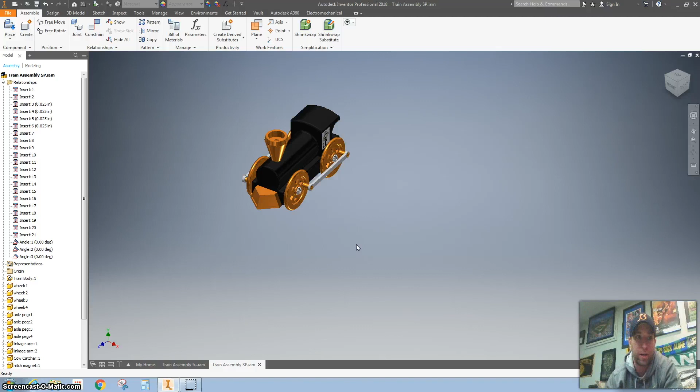All right, now that you got the assembly all done, it's time to add the train to the track. So let's go ahead and place in the curved track. You're only going to need actually one of these. Place it right there. Right click, hit OK.

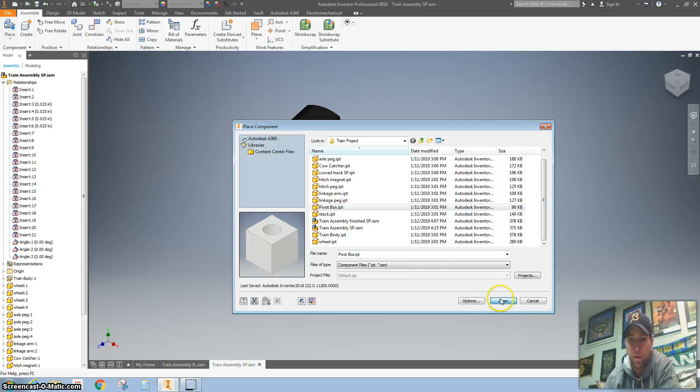And I'm going to grab a pivot box. So the pivot box is just a simple box or a cube with a circle in the middle of it. And now let's start constraining some things. So now let's make the track circular.

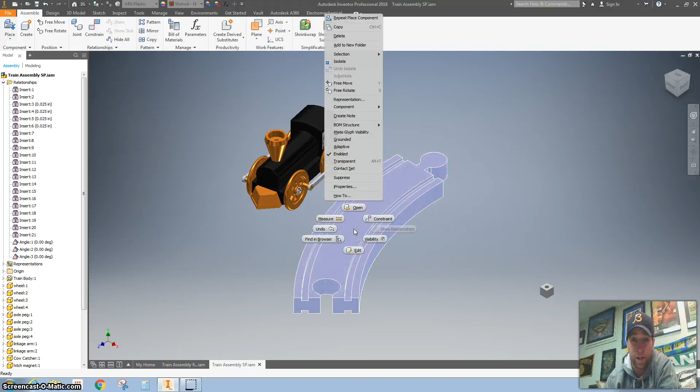So I want to click on this track, and I'm going to right click and ground this. So now that won't move. Actually, while I'm grounding things, let's click on the train body and unground that, because eventually we're going to put the train on the track. Alright, so that's all grounded.

Hit pattern, circular pattern, and you see I've got this selected. If you haven't selected it already, click on it, make sure it's blue. Another way you can check and make sure it's selected is it's blue over here.

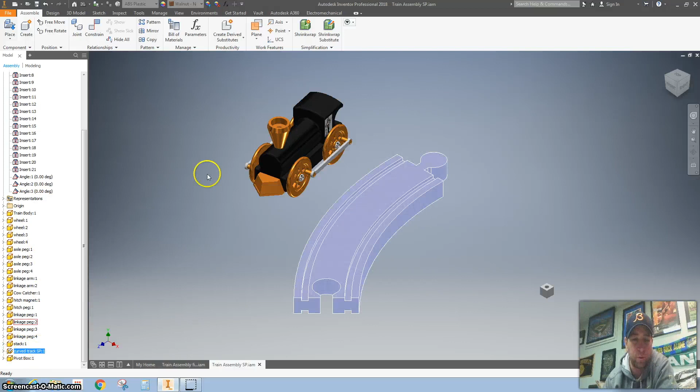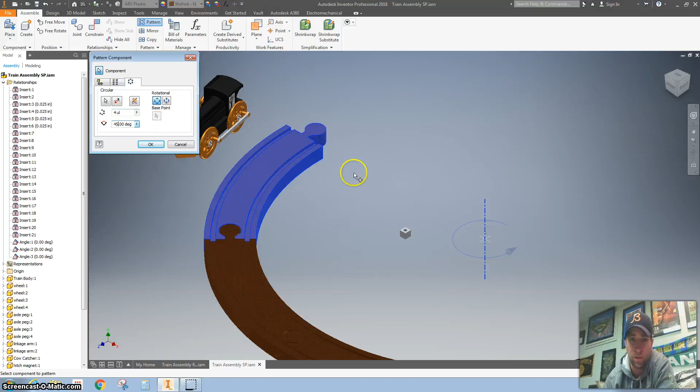And pattern, circular pattern, hit this red arrow, and you can actually pick any one of these curves. You can see I just clicked it one time and 4 of them showed up. I actually want to change this to 45 degrees. Look at that, they're all connected. And I'm going to need more than 4, so let's make that 8 and hit OK.

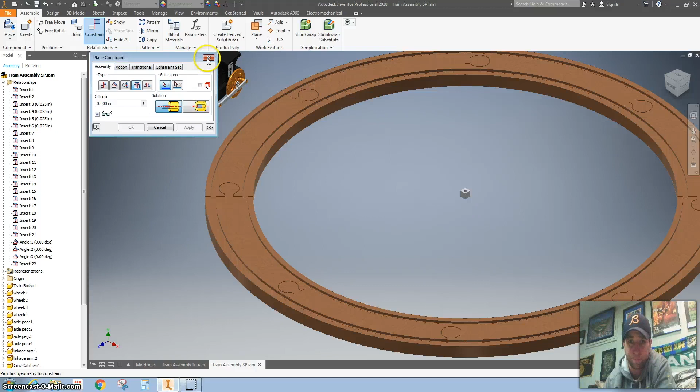Looking good. Alright, let's constrain this pivot box with an insert constraint. So I'm zooming in and I'm clicking on the circle there, and then I'm going to click on the inside of this curve, and actually you can click any of the curves on the track, and then I'll just line up the center lines, hit apply. And now let's get the train on the tracks.

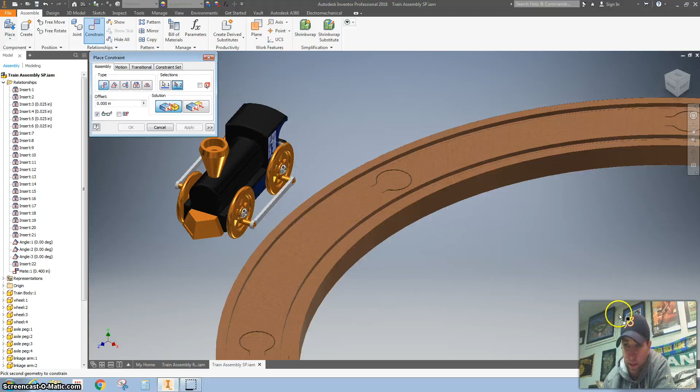Here we go. So I'm going to use a mate constraint with the top of the train track and the bottom of my train body. So I'm going to click on that, and I want to offset that 0.4. I want to mate the side of my train body with the side of my pivot box, and I believe I want to make that 15.3.

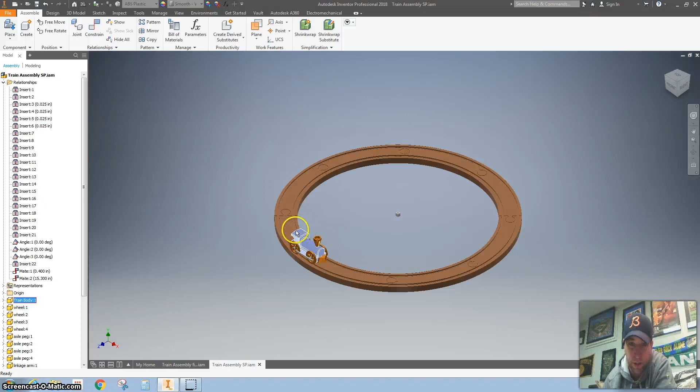Where'd my train go? I'm going to bring my train a little bit closer to the track. There we go. So as you can see, if I spin the pivot box, it's going to spin the train body.

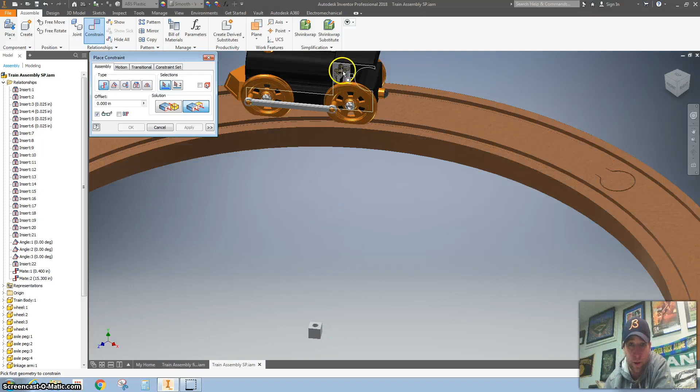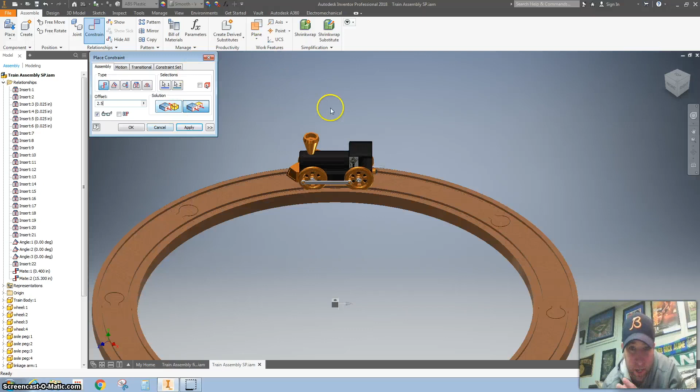And then I'm going to flush, so I hit constraint, and this part of the train is mated on there, so I want to click this. I want to flush with the back side of my train body, and then this is going to line it up. So I need to offset this 2.5. Can you see it just kind of turned a little bit? So now my wheels are right on the track.

You might have to make that like negative 2.5 if your train's facing the other direction. And then I can spin it around, and I am moving the train around the tracks with my mouse. It looks great.

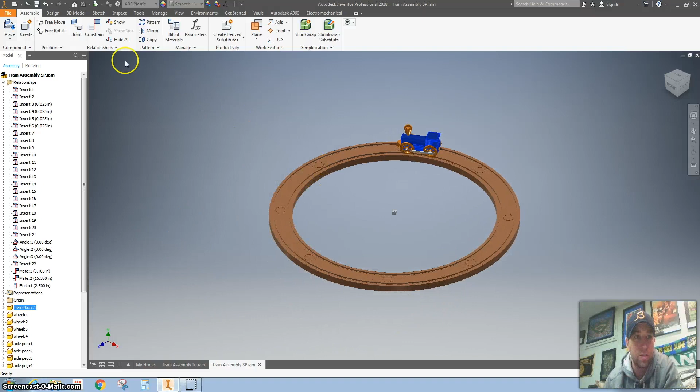This is a great time to save your work. So make sure you're saving it to your Google Drive. So File, Save As, and then make sure it's in your Google Drive.